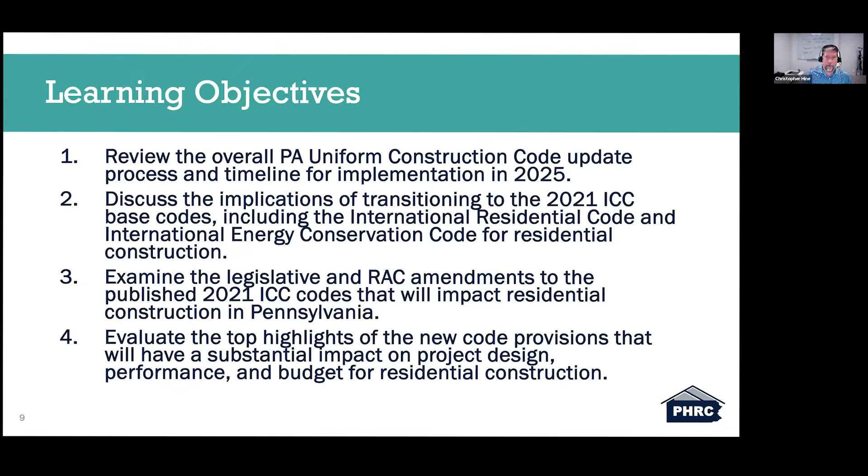Fundamentally, just starting off, we're going to answer these questions as we go through today's presentation. What is the PAUCC? What's changing? That's why you're here today, right? You want to know what's changing and when is it changing? And then most importantly, I think, where do I go for more information?

Darren, myself, and the rest of the PHRC team will provide multiple webinars and speaking engagements throughout this code adoption process, but we are not going to be able to cover everything. So it's important for us to provide you with some of those key changes, but sometimes more importantly, you need to know where you can go to find this information. Maybe you're doing a project and you remember one of us talking a little bit about this - let me now go to my resources and find out some additional information, because we obviously wouldn't expect everybody to remember everything that we say.

So first and foremost, what is the PAUCC, or the Pennsylvania Uniform Construction Code? That's the Pennsylvania statewide building code. I know we've gone through quite a few updates as I've been here with the PHRC, and we often get some comments coming back about the uniform code in Pennsylvania, the statewide building code - and there is one, right? There is a spot that everybody must go to find out what that overarching building code is.

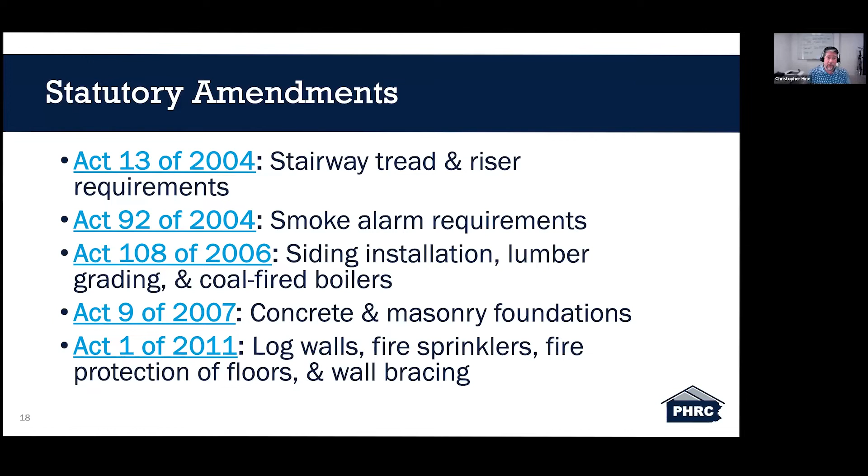The second grouping of modifications are the RAC amendments, and they are changing every time we have a new code adoption cycle, and the RAC does the review of those code provisions. They can make those changes for any code provisions that are different from the previous written code. So if you want to find, thank you Tom McCosby, 8 1/4 by 9 for those stair geometry.

If we want to look at the RAC amendments, you can again either download the handouts, and this is an active link, or you can get your phone out and scan this QR code and it'll take you right to the RAC report.

This report, and I have a copy of it right here, I'm not going to expect anybody to read that, but it's 52 pages, I believe, in this RAC report. And the way that it's laid out, when reviewing it, it's not just the IRC, it's all of the ICC codes compiled into one RAC report.

When looking at the text, there's some good giveaways as to what you're looking at. If it's regular text, it's context of what the code provision is going to happen. If the text is italicized, that is actual written code language. If any text is underlined within this document, that is added language in addition to the written code. And if any of the language has a strikeout through it, that language has been removed. So there's a little bit of a legend when going through this RAC report.

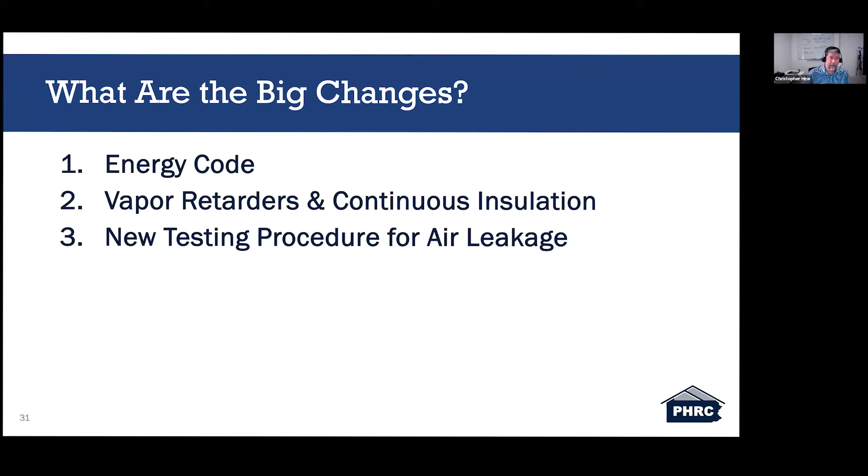So we're going to look at the energy code in Pennsylvania. We're going to look at continuous insulation and vapor retarders. I kept switching how I wanted to label that back and forth. I am going to touch on vapor retarders a little bit sooner in that section, and then kind of dive into how it relates to the continuous insulation portion of it. And then there are new testing procedures for air leakage, right? It's still a blower door test, but how it's calculated will be different. So I will look at a couple different situations or examples on how they're now calculated.

So number one here is energy codes in Pennsylvania. We are currently, this is what where we're currently standing, right? The UCC Energy Code Summary. We have the 2018 Chapter 11. We have 2018 IECC, or the residential provisions out of the IECC with those RAC amendments. This is what that state or that climate zone looks like.

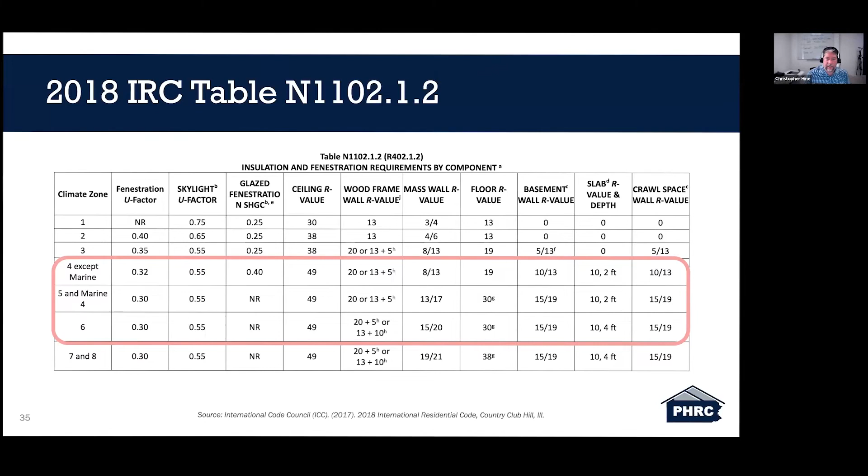Zooming in to Pennsylvania, we are under three climate zones: climate zone 6, 5, and 4, right? The blue here is climate zone 6, the green is climate zone 5, and this yellow down here in the corner in the Philadelphia area, and I believe this is Lancaster County, York County. I'm sure somebody will let me know in the chat. Maybe York County. But either which way, you know where you are in those climate zones. They will be changing. Again, looking here at our insulation and fenestration table, we have these three different climate zones and where we currently stand. A couple of these will be the same, and some will be changing.

Moving into the new code adoption process. So looking into 2021, we again have Chapter 11 out of the IRC. We have the residential provisions out of Chapter 4 in the IECC. We have the RAC amendments that change some of that, some of the language. It doesn't adopt everything. And then we have the Pennsylvania alternative. Yes, York County. Thank you very much, Sean.

But what we're going to look at here today are these first three areas. We are not going to dive into the changes because we don't have them yet. We're currently under the modeling process for the Pennsylvania alternative.

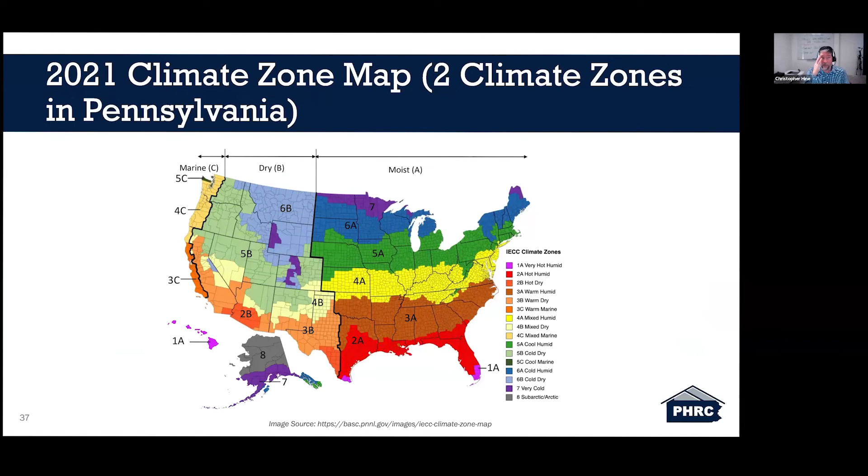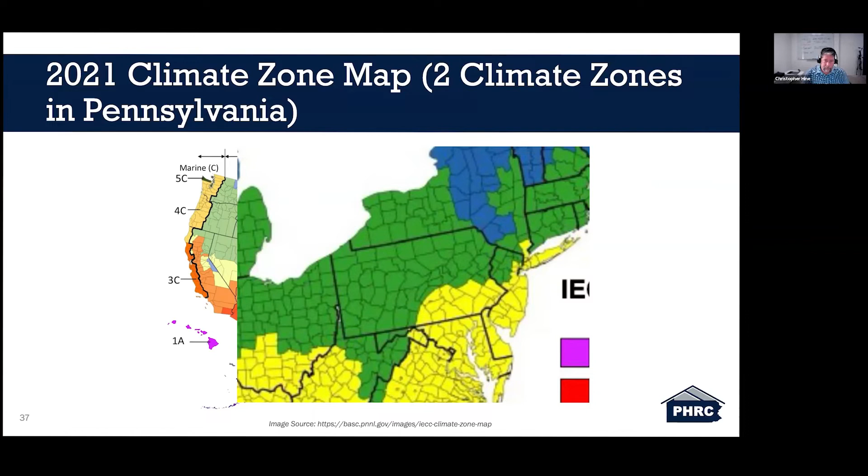So here we are looking at the 2021 climate zone map. This is of the country. And I'm sorry, it's not your eyes, this is blurry. This is the cleanest map I could find. But when zooming in, it does get a little bit blurry. And as you can see, Pennsylvania now only has two climate zones. So roughly 3/4 or 2/3 of the Commonwealth of Pennsylvania is going to be under the new climate zone 5 area. And then roughly 1/4 or 1/3 of Pennsylvania is going to be under the new climate zone 4. And you might be thinking to yourself, well, that's interesting.

So we're now removing climate zone 6. And I want to stop that right now, right? Because it's not, we're going from 3 climate zones to 2 climate zones, but I don't want to give a false impression by saying, yes, we are getting rid of climate zone 6, because when looking at the R-values, it's more like, or more along the lines of removing climate zone 5-ish and then sliding or merging climate zone 6 with climate zone 5.

So these are the new insulation and fenestration tables transitioning into the 2021 ICC codes with amendments, because it's extremely important to know that these values as written here are not the same as they are written in the 2021 Chapter 11 out of the IRC, or the residential provisions out of Chapter 4 of the IECC. This table was explicitly pulled from the RAC report—you can look at the source here at the bottom, and clicking on that will take you directly to the RAC report. This table is as shown here within that RAC report. So if you were hoping to open the IRC and find what the R values are moving forward, they are going to be slightly different than what's being shown here.

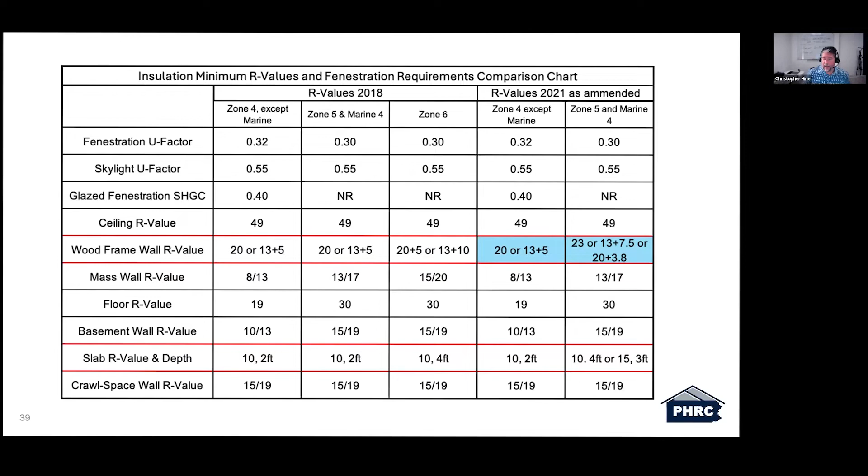I wanted to pull this in because there was a major provision in the written provisions of the 2021 IRC having to do with the additional energy efficiency portion. This section was not adopted during the RAC process. So the RAC report, section N1101.13.5, additional energy efficiency, was not adopted as part of the current Pennsylvania adoption of the 2021 IRC or IECC. This really does tie into provision N1108.2, additional energy or additional efficiency package options.

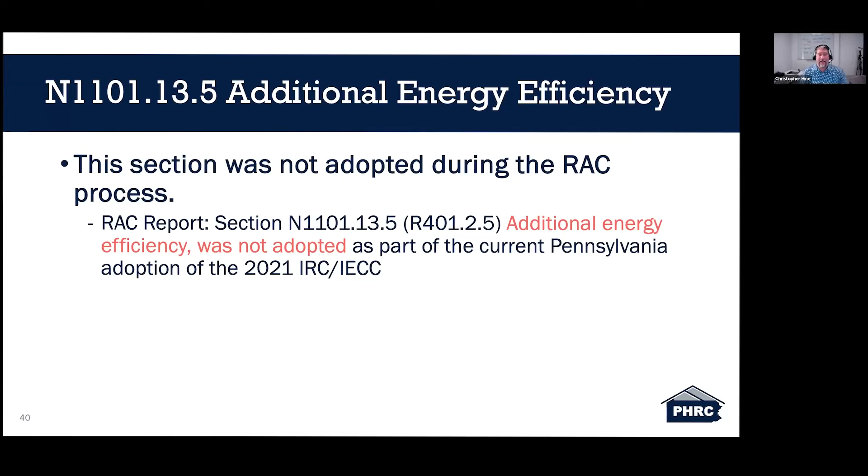There was a modification to this. Previously, this would be a strikeout in the RAC report showing this section was not adopted. This provision, talking about additional energy packages, was modified where it pulled out the compliance reference—N1101.13.5 was struck out because it was not adopted. So the point I want to get at here is, if you're into the light reading of code language and work through chapter 11 to N1108.2, which talks about the additional efficiency package options, this language was not completely struck from the code—it was taken from being a mandatory requirement to an optional requirement.

So as you can see here, this is the language out of this middle portion of the RAC report, striking out for compliance with section N1101.13.5, which takes it from a mandatory requirement to being optional. The context here is this modified language leaves the provisions in the code but they are no longer mandatory. They can now be a guide for increased energy efficiency. You can look at these additional efficiency package options and include some of these provisions to help increase energy efficiency, used as a guideline, not as a mandatory requirement.

So what does this mean when looking at the energy code adoption? Moving forward, check your location for change in your climate zone. If you were in the middle of the state and previously climate zone 5, more than likely you're still going to be climate zone 5. However, there are some changes to your R values.

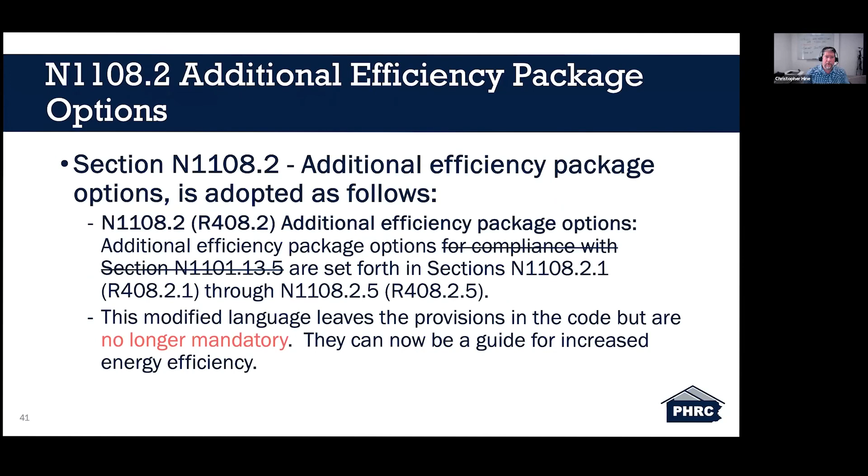Let me jump back super quick. One of the biggest changes here for climate zone 5 is either a cavity only R23, or going with 13 plus 10, or 20 plus 5, which does require prescriptively exterior continuous insulation for roughly 3/4 of Pennsylvania. It's an important point I'd like to hammer home. Continuous insulation may become more mainstream due to the prescriptive requirements. Again, 3/4 of Pennsylvania is now going to prescriptively require, if you're not going with an R23 cavity only, a cavity or continuous insulation requirement.

Look for new high density insulation that can meet the R23 cavity only requirement. Again, mineral wool does meet that for 2x6 construction. You can get an R23 cavity only. And Brian Keene just posted in the chat - we might be able to share that with everybody, if you don't mind Brian, a link to an R23 fiberglass option.

Review slab insulation details for the potential of R10 for 4 feet or R15 for 3 feet. This might be an estimating or takeoff consideration. We want to make sure that moving forward this doesn't get overlooked. It's not a large change, however, looking at going from 2 feet to 4 feet, it is definitely going to be a takeoff consideration.

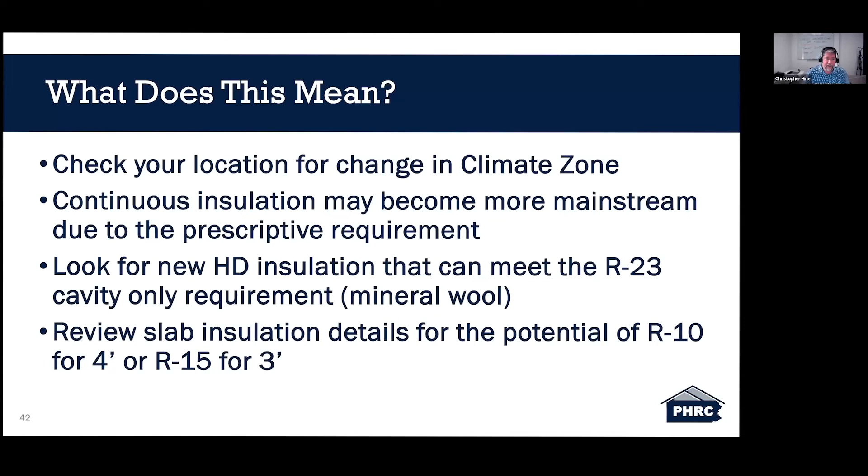Okay, jumping into vapor retarders and continuous insulation. The vapor retarder requirement or provision did change slightly, so I want to make everybody aware of some of the nuances, or some of the added changes, some of the additional tables that are now added to help along the process of choosing the most correct vapor retarder for your assembly. So here is the new language. If you look at the exceptions, basement walls is still there as an exception for a vapor retarder. I just want to throw that out there before we jump into the depths of the vapor retarder requirement.

So looking at our first portion here, vapor retarder materials shall be classified in accordance with table 702.7(1). This is similar to what we've had previously when talking about our different classifications. I don't know if all of this information has been previously included in the code language, but it's nice that it now gives our class 1, class 2, and class 3. It also now provides the perm rating, which classifies within those different classes, which was not previously in the code. So this all-in-one table is definitely a good step in the right direction.

Again, looking at class 1, the perm rating must be less than or equal to 0.1 perm. Looking at class 2, it has to fall within 0.1 to 1 perm. And then jumping to class 3, it must be 1 to 10 perm. Anything greater than 10 perm is vapor open and is not considered a vapor retarder.

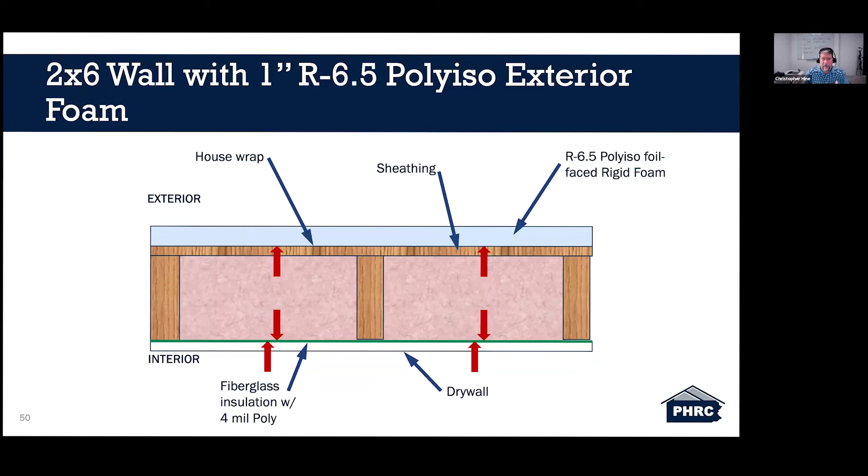And then we have fiberglass insulation with a 4 mil poly on the interior. 4 mil poly is also a class 1 vapor retarder or vapor barrier. Previously, or currently in the 2018 code, this is a code-approved design, which again does carry with it some significant risk with class 1 vapor retarders on both the interior and exterior.

Again, jumping back to this table with footnote B, the use of a class 1 on the interior and a class 1 on the exterior now requires an approved design. So at least now the code is taking reference to that design and requiring an approved design. They're really pushing you to use, for climate zone 5, a class 2 vapor retarder on the inside as opposed to a class 1, which is again a step in the right direction here.

The other thing I want to point out here is that for climate zone 4, you can have a class 2 or class 3, both are permitted within this table.

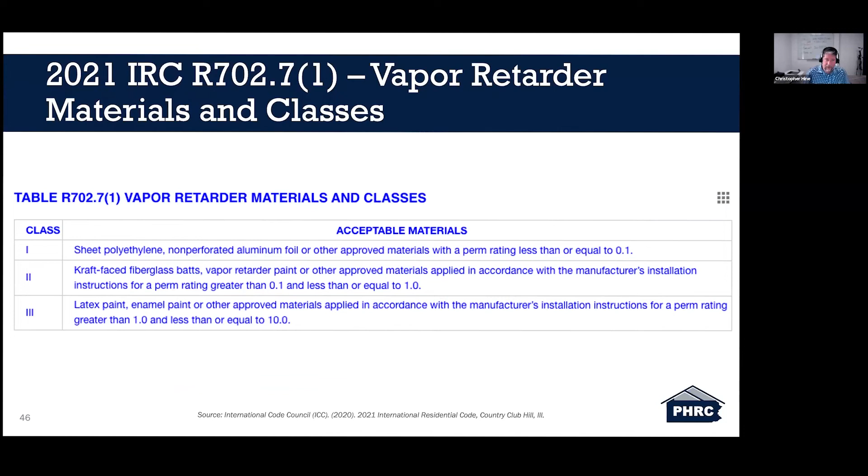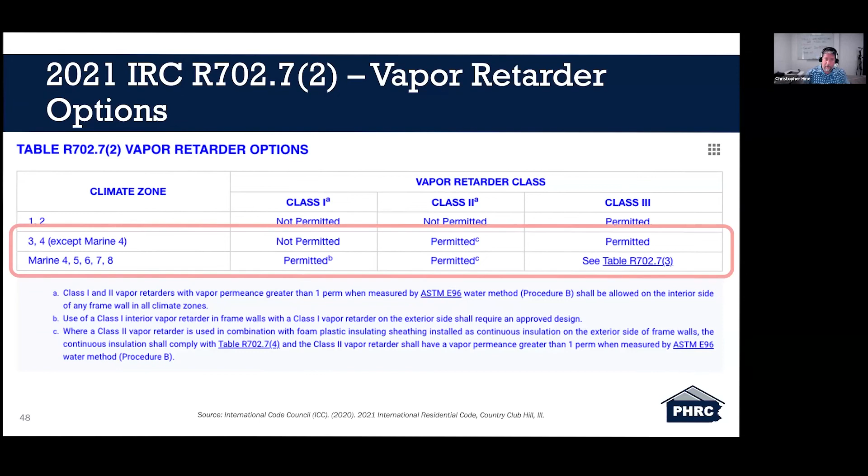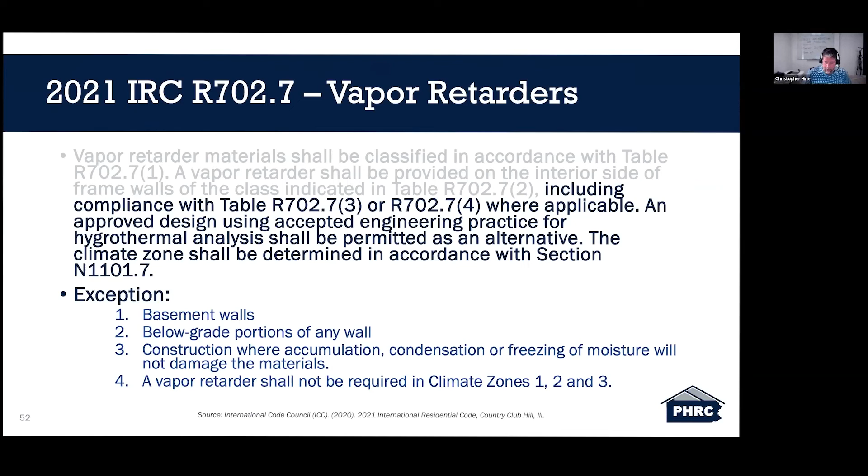So the last two tables we're going to look at, again, we now know looking at this table what vapor retarders are and what their classifications are. This next table now says, okay, now that you know what the classifications are and what types of materials are included in each classification, these are the climate zones in which you have to apply those vapor retarders. It now allows us to take a look at including the compliance for table R702.7 parenthesis 3 and parenthesis 4 where applicable, because it's important to know where applicable here.

This is 702.7 parenthesis 3, looking at reducing the prescribed class 1 or class 2 vapor retarder for climate zone 5 to now having the option of introducing a class 3 vapor retarder for climate zone 5 in regard to using continuous insulation. So this table says that in climate zone 5, you can go from a class 1 or class 2 vapor retarder to a class 3, provided that you have continuous insulation with an R value greater than or equal to R5 for a 2x4 wall, or greater than or equal to 7.5 for a 2x6 wall.

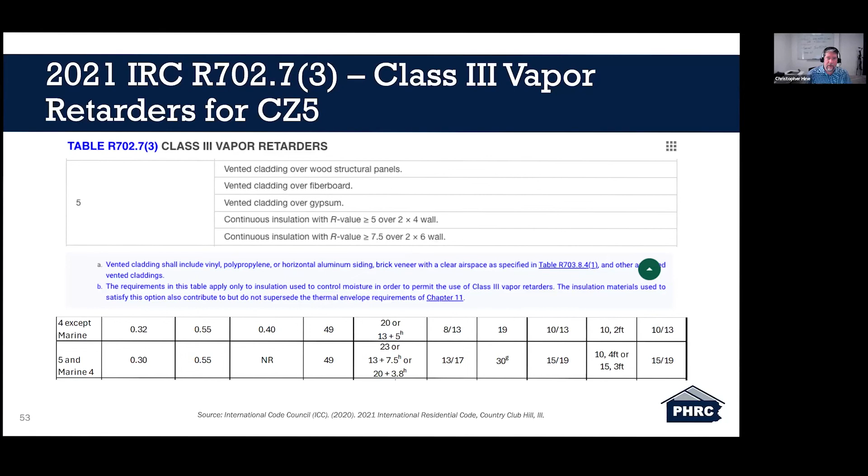This last one here, remember it says as applicable. This table here is probably not going to be as applicable for most situations. This talks about continuous insulation with a class 2 vapor retarder when installing continuous insulation, not necessarily for the need of the prescriptive value, but really for moisture control. If you look at footnote A here, it says that the requirements of this table apply only to insulation used to control moisture in order to permit the use of a class 2 vapor retarder.

This insulation material used to satisfy this option also contributes but does not supersede the thermal envelope requirement. But again, if we want to look at the R values, we do comply here.

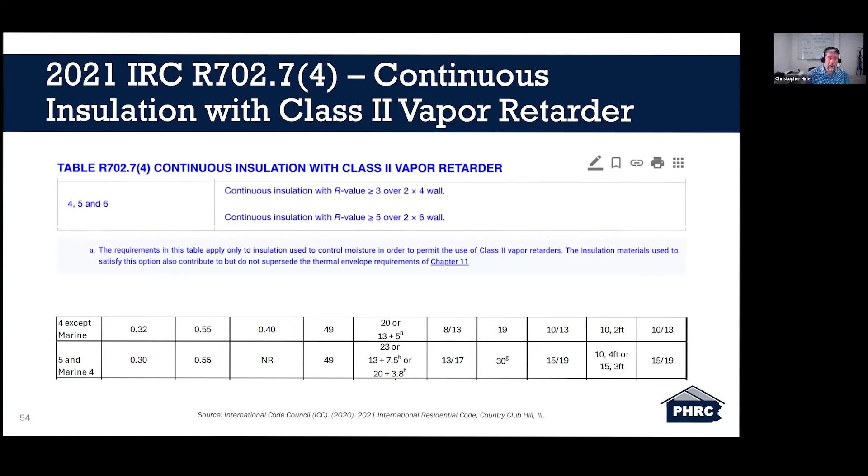This is for climate zones 4, 5, and 6, where we have to have greater than R3 over a 2x4 wall. If we jump to climate zone 5, a 2x4 wall is already requiring R7.5, so we exceed this, and a 2x6 wall requires greater than or equal to R5. I don't know if you're going to find an R3.8 -- it's probably going to be an R5 anyway. So again, we do meet the intent, but it's not meant to supersede the required R value. It's really just for choosing a continuous insulation to combat or control moisture.

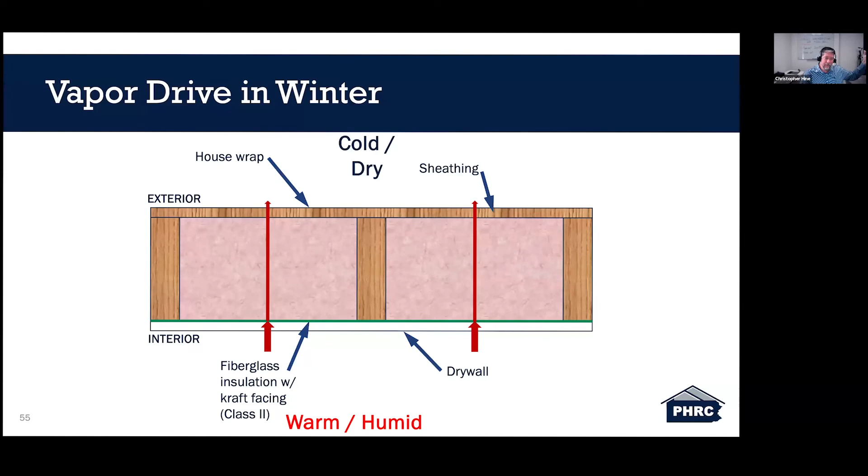Okay, now let's look at a couple examples. Here we have a standard 2x6 wall that does not have any exterior insulation, but what I really want to look at is our moisture drive, or vapor drive, in the winter, because that's where you're going to have the most concern for condensation. Our drive is going to be from the interior out -- it's going to move from a high concentration of heat to a lower concentration, which means it moves from interior to exterior.

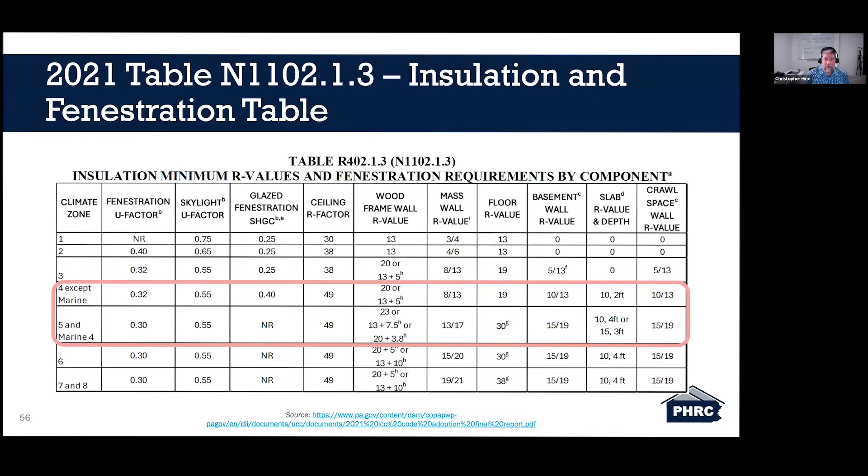Looking at our prescriptive R values: for climate zone 4, it's R20 or 13 plus 5. In climate zone 5, it's a cavity-only R23, or 13 plus 7.5, or 13 plus 10, and R20 plus 3.8 or 5. But the amended code does allow you to go down to the values shown here in the table.

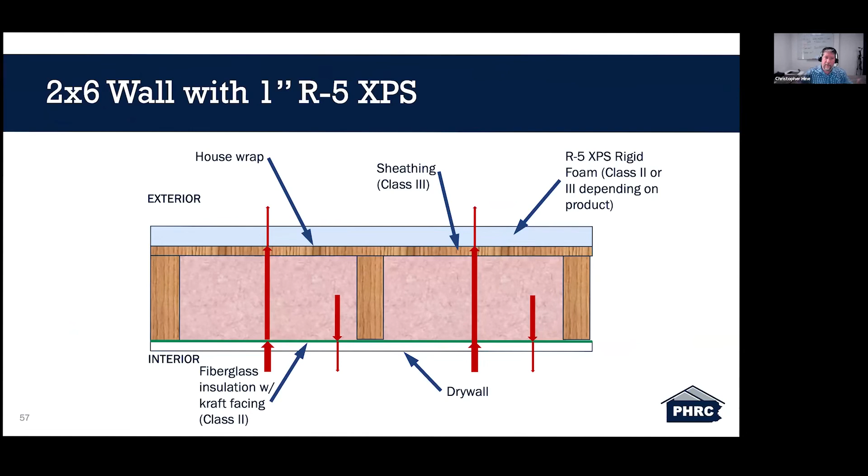So looking at a 2x6 wall, here we have R20 plus 3.8, or R20 plus 5. Our moisture drive is again going to be from the interior out. Does this assembly allow for drying? I would say it does. A 1-inch rigid XPS is roughly a 1.5 perm.

Looking at the table for vapor retarders in the new code, a 1.5 perm falls between 1 and 10, therefore it is a class 3 vapor retarder. The kraft-faced batt insulation has a kraft facing that is a vapor retarder of 1 perm, so it's a class 2. House wrap is vapor open for the most part. Is this good? I would say yes.

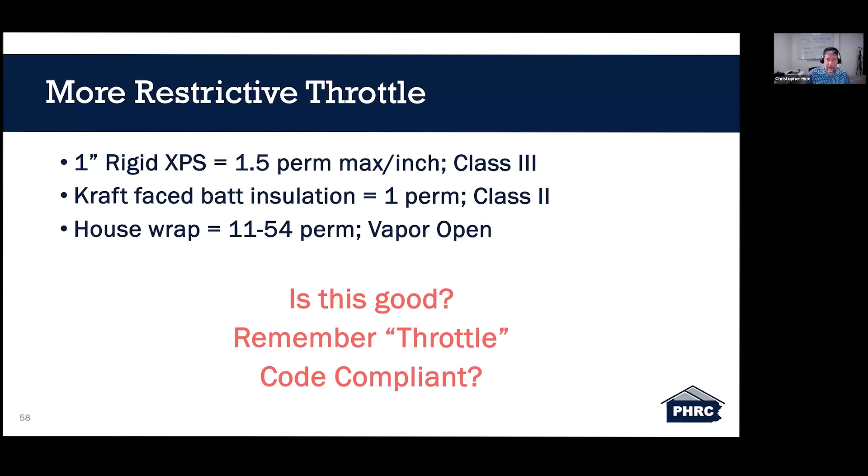Our throttle in this case, or our most limiting factor for vapor transmission, would be the class 2 vapor retarder, or class 2 kraft facing. And this is indeed 100% code compliant.

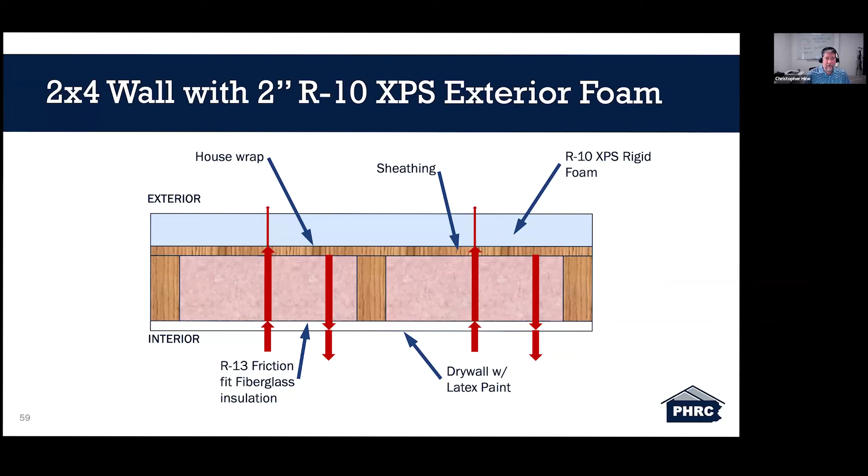Jumping to a 2x4 wall with 2-inch R10 XPS on the exterior -- again, our vapor drive is still going to be from the interior out. We have a 2-inch R10, which is a 0.7 perm. This is a class 2 vapor retarder -- anything between 0.1 and 1 is a class 2 vapor retarder.

It is a friction-fit batt insulation. This does meet the intent of going to a class 3 vapor retarder. So our latex paint is 6 perm, which is a class 3. Is this good? I would say yes -- this assembly is allowed to dry both interior and exterior.

The throttle, again, or our most limiting factor for vapor transmission, is our 2-inch R10 rigid foam, which is a class 2. Rule of thumb here -- and this is just a rule of thumb -- is that whenever you have a wall assembly with exterior continuous rigid insulation, one-third of that total assembly R value should be included in that continuous layer. This wall assembly here, one-third of the total wall assembly is 7.6, and we have more than one-third of that on the outside.

That definitely helps reduce the risk of condensation, right? So that one-third rule of thumb -- I want to make sure everyone understands this is a rule of thumb only. One-third of that on the exterior does dramatically decrease the risk of condensation.

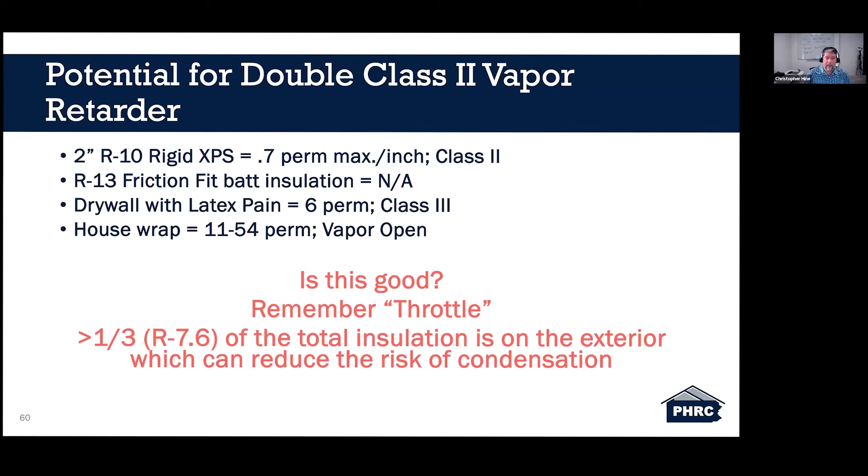Okay, jumping to our last portion here. Boy, 2 minutes left. Rachel, you win on that one. I did not finish on time.

Looking at the blower door testing requirements, a quick recap of where we are today in the 2018 code: the building or dwelling shall be tested and verified as having an air leakage rate not exceeding 3 air changes per hour in climate zones 3 through 8. Pennsylvania in 2018 is in climate zones 4, 5, and 6, so it shall not exceed 3 air changes per hour.

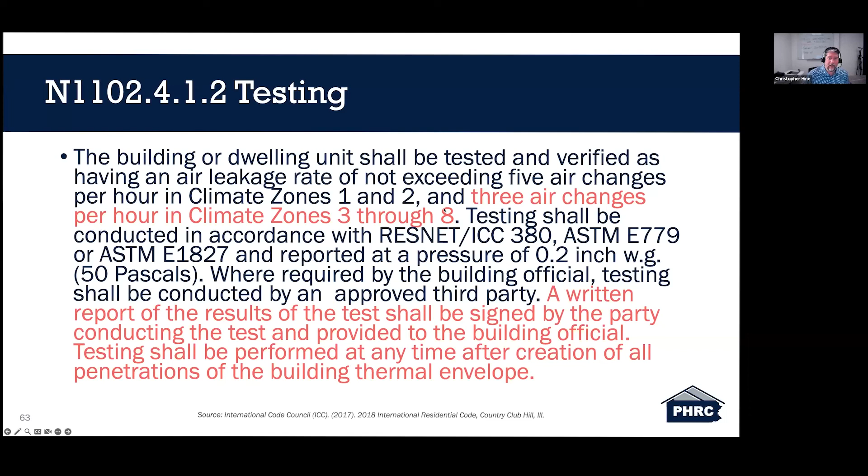Did the last slide say 5 air changes per hour, not 3? It does say 5 air changes per hour, but that's for climate zones 1 and 2. Pennsylvania is in 4, 5, and 6, that's why I jumped to the red. It shall not exceed 3 air changes per hour for the climate zones located within Pennsylvania.

So blower door testing in the 2021 IRC. This language did change. The building or dwelling unit shall be tested for air leakage. The maximum air leakage rate for any building or dwelling unit under any compliance path shall not exceed 5 air changes per hour, or 0.28 cubic feet per minute per square foot of dwelling unit enclosure.

There's a whole lot to unpack here. The first thing, which I won't dive deep into because there are a lot of additional requirements, is the 5 air changes per hour. If you're running a prescriptive or performance energy compliance path, that changes to 3 for the climate zones in Pennsylvania. Getting further into this, you can jump to 5 air changes per hour, but it's a trade-off within performance compliance paths, so we're not going to touch on that.

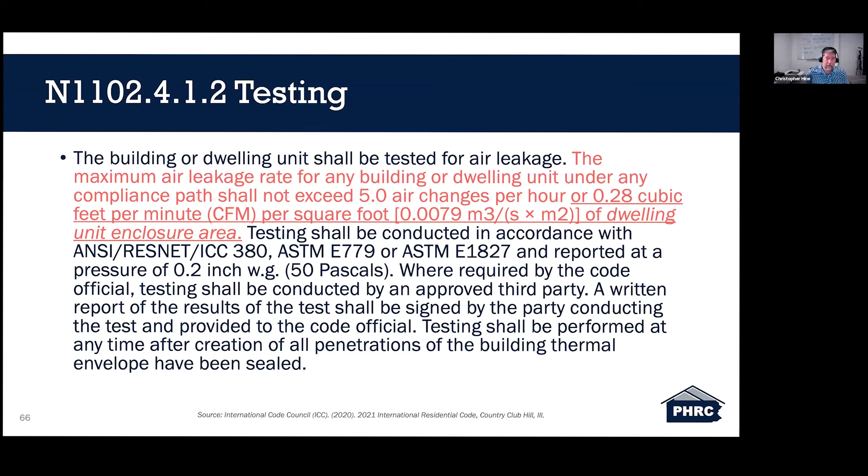What we're really going to touch on is the 0.28 cubic feet per minute per square foot of dwelling unit enclosure area. This is important to know because it's a new term applied in the 2021 IRC, and thankfully it is defined. Dwelling unit enclosure area is the sum of the area of the ceiling, floors, and walls separating a dwelling unit's conditioned space from the exterior or from adjacent conditioned or unconditioned spaces. The wall height shall be measured from the finished floor of the dwelling unit to the underside of the floor above.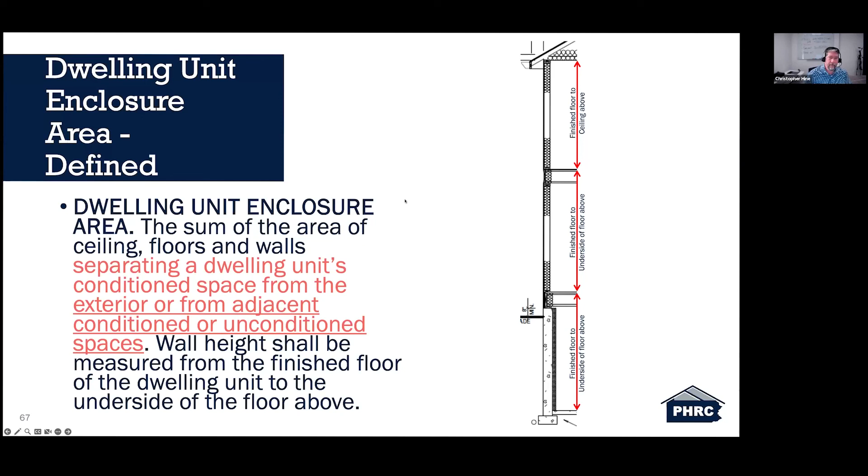I gave a webinar about a month and a half ago on air tightness for attached dwelling units, and I went through this definition there, but I wanted to clarify the second portion: wall height shall be measured from the finished floor of the dwelling unit to the underside of the floor above. So we're going finished floor to the underside of the floor above, finished floor to the underside of floor above, finished floor to the ceiling. I wanted to clarify that.

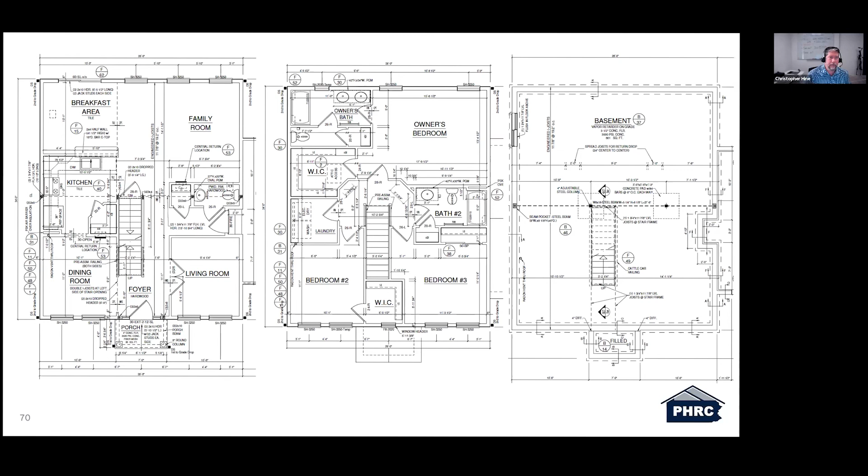We're just going to assume that we tested it and that's what we got. So it's cubic feet per minute times 60, because we're looking for air changes per hour, divided by the total volume of our house, which is 22,050 cubic feet. And that gives us a 3.8 ACH 50.

This would not pass under the 2018 provisions. Remember, 2018 provisions state that within the climate zones in Pennsylvania, you have to be less than or equal to 3 ACH 50. This would not pass.

Now let's look at that same house. We still have 1,425 CFM through the fan, but now we're looking at the 2021 testing provisions. So instead of volume, we're looking at square footage of dwelling unit enclosure area.

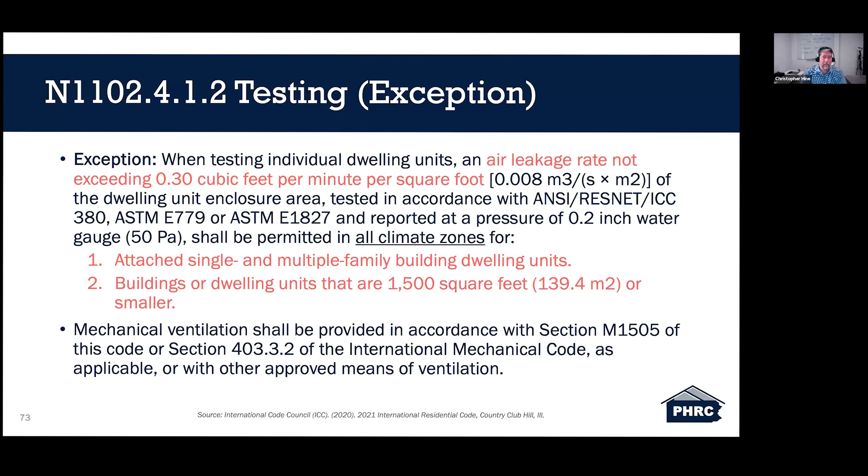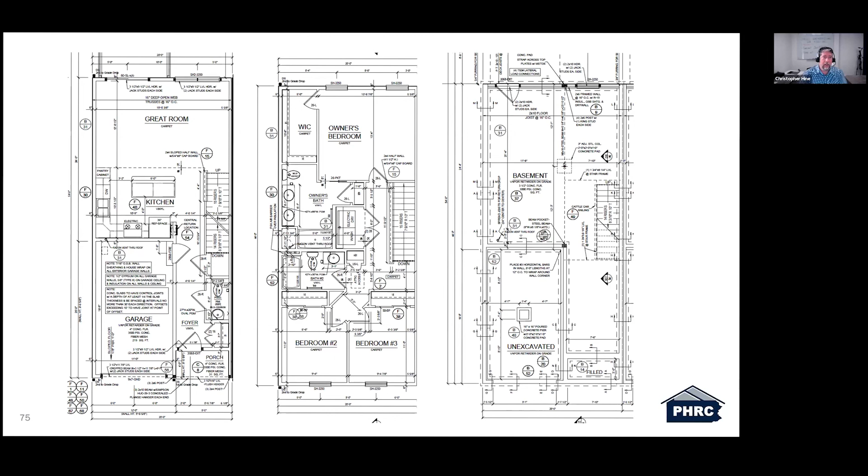We are now looking at an attached unit under the 2018 testing provisions. For the sake of time, I'm not going to run through all of these numbers, but more importantly, we are at 4.9 ACH50. We are dramatically over the less-than-or-equal-to 3 ACH50, at 1,375 cubic feet per minute moving through that fan at 50 pascals.

This would fail. One of the main areas of concern we've heard over the past several years is that it's extremely difficult for small homes and attached homes to pass the 2018 blower door testing provisions.

Looking at the 2021 testing provisions, again I'm not going to run through these numbers, but feel free to take a look at them yourself. This gives us 4,738 square feet of dwelling unit enclosure area, and using the same 1,375 CFM at 50 pascals through the fan, that gives us 0.29 CFM50 per square foot.

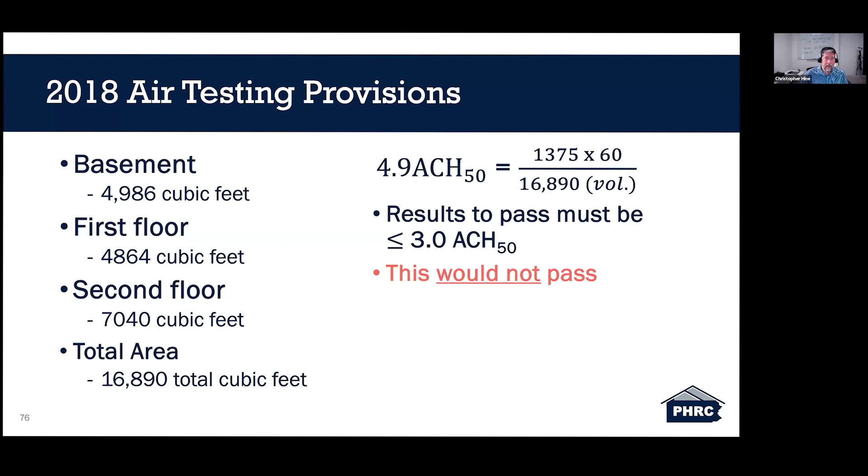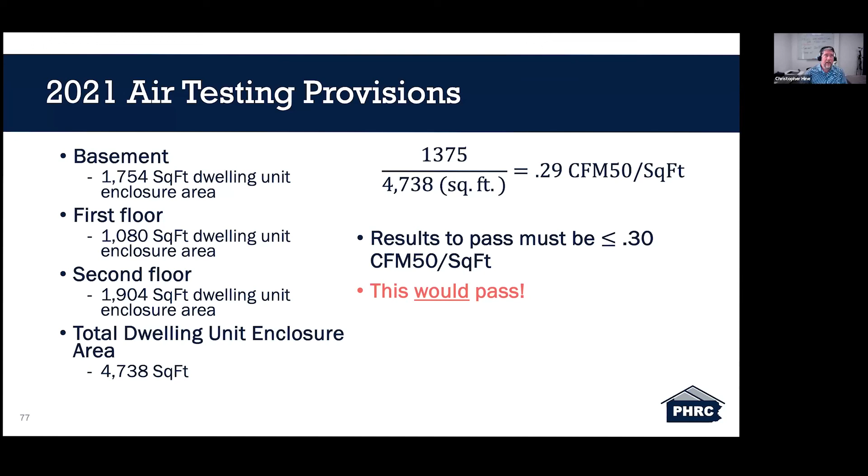That passes. Again, looking back at the 2018 testing provisions, we come up with a 4.9 ACH50 - this fails. Looking at the 2021 testing provision, this now passes with a 0.29, and it only had to be 0.30. So there's a pretty significant change here that allows for a larger probability of passing blower door tests for attached dwelling units and smaller square footage detached units.